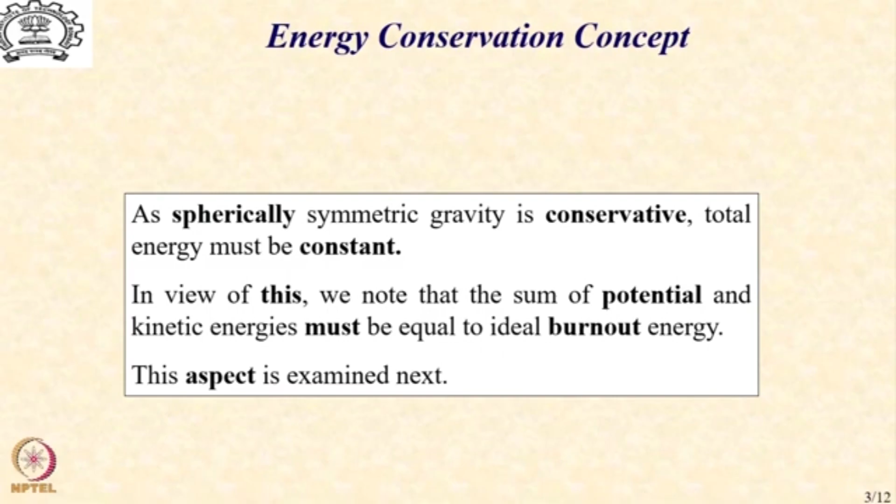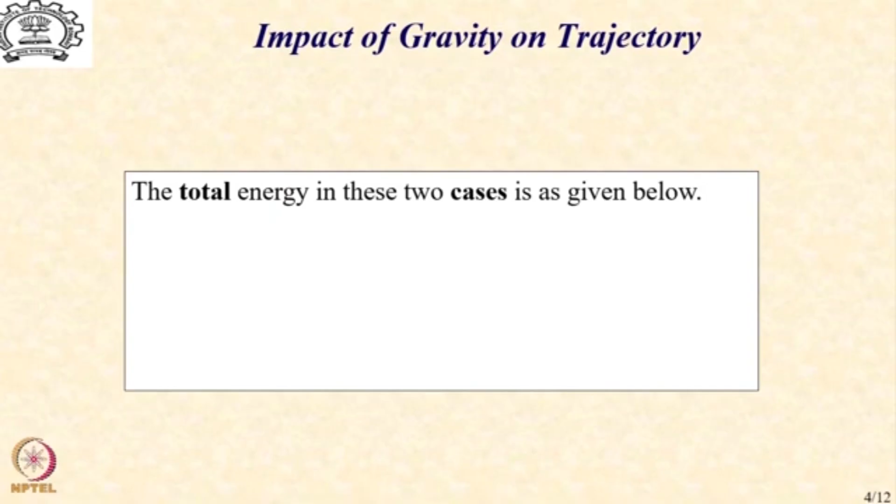So we take the same problem that we have solved in the previous lecture, and let us calculate the total energy in the two cases, that is the ideal burnout and the burnout in the context of constant gravity model. So in the ideal burnout case, the kinetic energy is the only energy, because there is no gravity, so no work done against gravity. And that is nothing but half V square, and that is per unit burnout mass. So we have normalized it because the burnout mass is same in both the cases. And that number is 5.327 × 10^6 with appropriate units.

In case of burnout under gravity, the total energy is going to be half V square, that is kinetic energy, plus g into h, which is going to be the potential energy part. So we perform that sum. I suggest that you do this exercise yourself and confirm that under gravity the energy is going to be this value, which is 3.393 × 10^6, and that is something which is not expected. The total energy under gravity is significantly less in comparison to the total energy under ideal burnout.

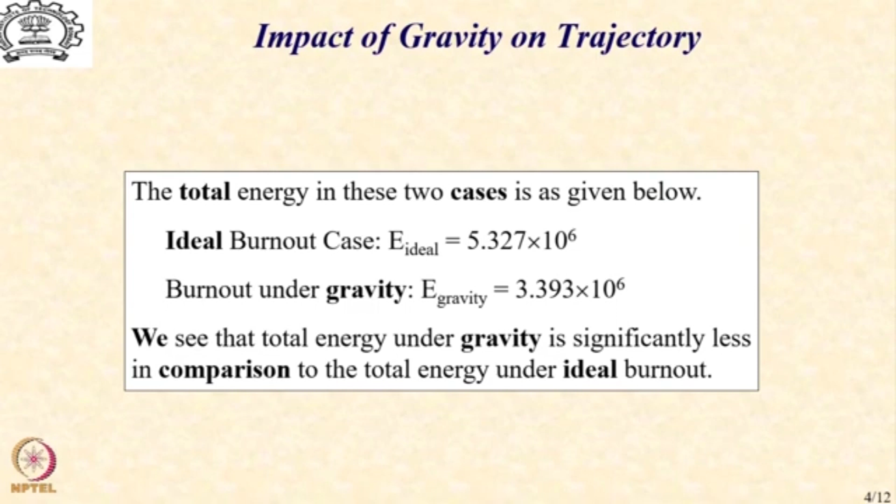So our hypothesis that as the gravity is a conservative force field, the total energy should have remained constant is not justified. It is violated. So let us try and understand what has happened. So we know that total energy which should have been conserved is not conserved. So we bring in a point which probably we did not specifically note while talking about energy conservation. You would realize, and probably you can independently confirm, that the energy conservation holds good only if the mass is also conserved. This is something that is part of the various conservation laws that are established, and you can verify this independently.

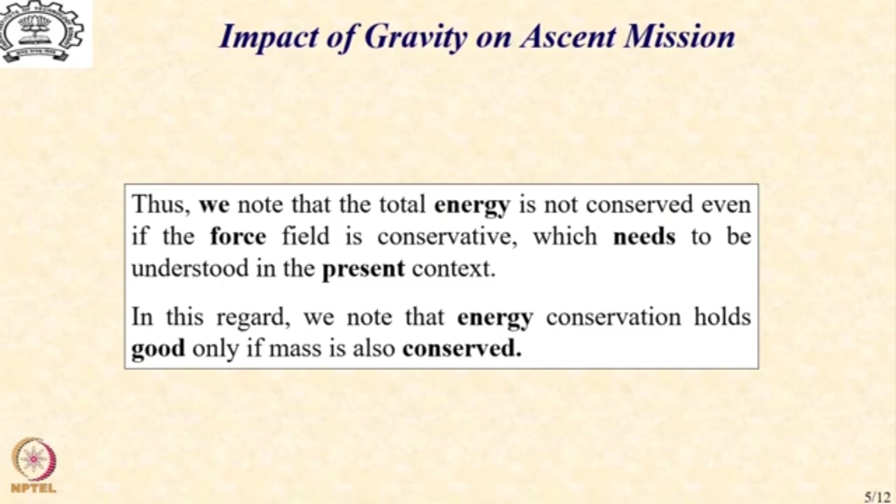But let us now bring in this idea about mass conservation to see whether there is an issue which is causing this deficiency of energy. So in the present case, we find that though in an overall sense mass is conserved, which means if we choose a control volume approach which contains the rocket and the burnt gases as a single control volume, the mass is conserved and so the energy is also conserved.

But we realize that this burnt mass in form of a gas is absolutely useless to the ascent mission, as this energy is not recoverable as far as the burnout mass MB is concerned, which is the payload as far as we are concerned. So obviously this energy is simply a loss to us. It is released in the atmosphere at different altitudes as the ascent mission proceeds, as clouds of gases, particles which have been given velocity and altitude, but then it's all a waste.

There is another aspect which we need to note, that while we are burning a small portion of propellant which generates this cloud of gas which contains particle and energy, the energy that it imparts to the rocket also goes to the unburnt propellant which is still there and which is going to get burnt in the next instant. So not only we are wasting the energy which is part of the gas cloud, we are also imparting wasteful energy to the unburnt propellant, which in the next or subsequent time instants we are going to burn and throw away. So that energy also is going to be a loss.

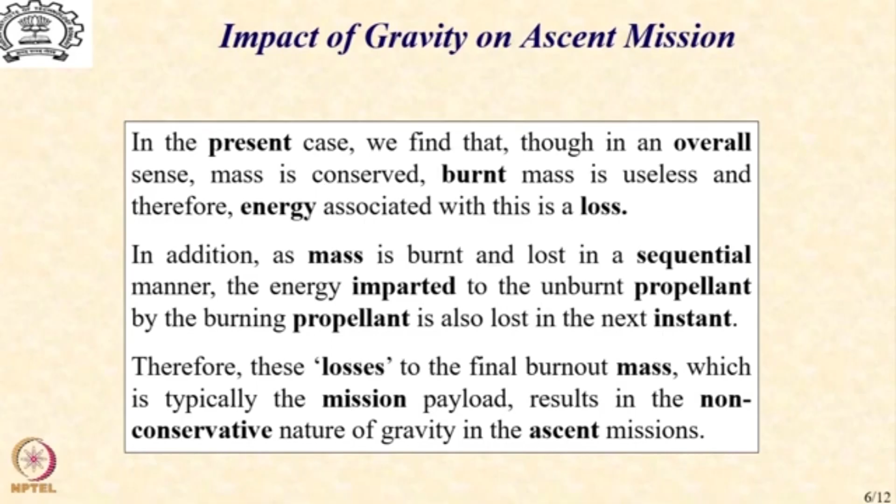If you put all this together, you will find that this is going to represent a reasonable amount of loss and will be responsible for the non-conservative nature of gravity in the ascent mission. So please note, we are not violating any of the fundamental conservation laws. But by defining our energy conservation in a very, very specific manner, that is, the energy which is imparted to the burnout mass, the final unburnt mass which is left after all the propellant has been consumed, the mission is non-conservative in nature, even under the action of a conservative force field such as gravity.

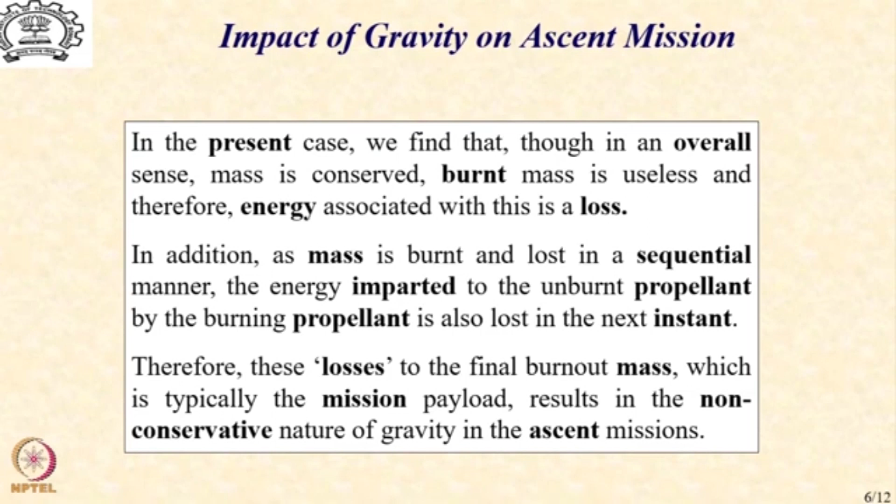In fact, in the present case, you will note that this loss is almost of the order of 36%. And naturally it is not tolerable. So there must be an effort to reduce this loss to a significantly lower amount. We may not be able to completely eliminate it, we don't know yet, but at least it cannot be allowed that 36% of energy is simply lost. That is going to have a huge impact on the cost of the mission itself.

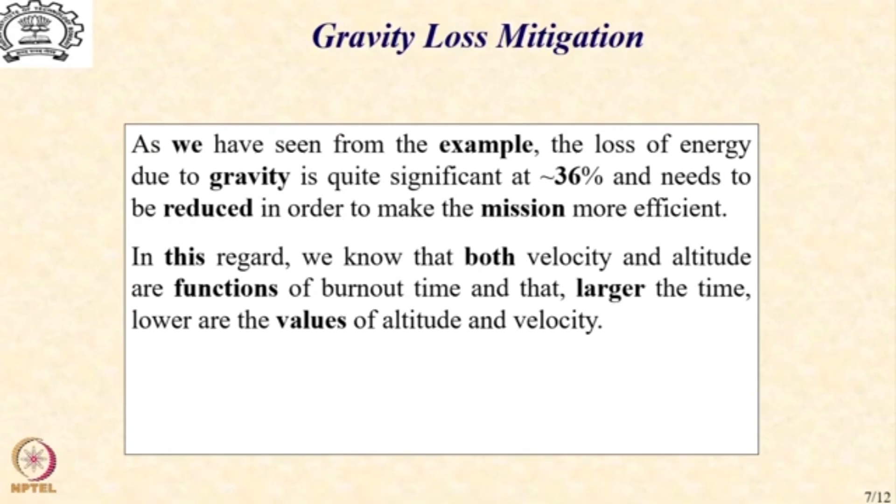So in this regard, we know that both velocity and altitude are functions of burnout time, and that the larger the time, the lower are the values of both altitude and velocity. This you can independently confirm from the expressions that we have seen in the last lecture. So obviously it means that an important parameter which is responsible for this loss is the burnout time, the time taken to complete this whole process. So if we can directly impact the time, maybe we can influence the overall loss and make the mission more efficient.

And this can be done in one way by increasing the burn rate. So if you increase the burn rate for a given propellant, then the time that it takes to finish the propellant is smaller, and because the time is smaller, the loss due to gravity is likely to be smaller. Let us see if this is justifiable, and this actually turns out as what we have interpreted.

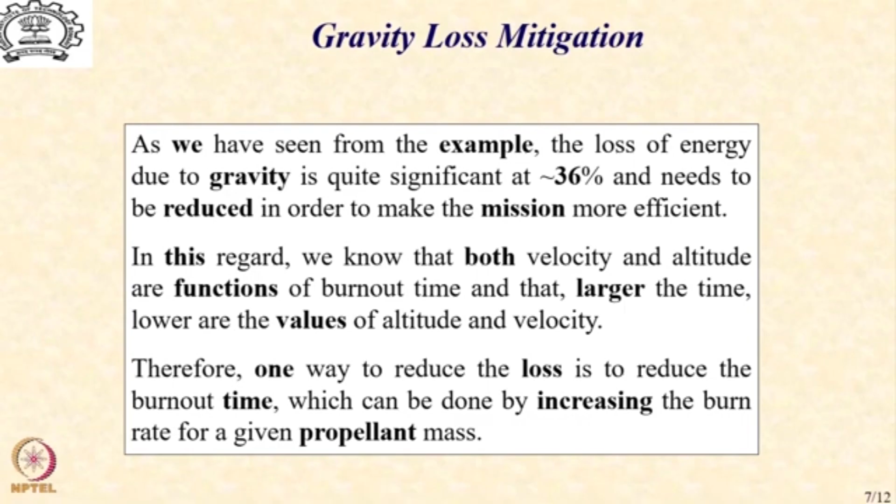So let us now consider the same example that we have seen earlier and now generate the terminal condition for two different burn rates, one of 600 kg per second that we have already seen, and another one double, that is 1200 kg per second. And let us look at the solution. I'm not going to go through the steps of arriving at the solution. I suggest that you do that, but I'm giving you the final result.

So we already know our ideal velocity is 3.264 kilometers per second. For 600 kg per second burn rate, our burnout velocity is 2.28 kilometers per second with an altitude of 77.6 kilometers. And for 1200 kg per second, the velocity is 2.77 kilometers per second with an altitude of 51 kilometers. So you realize that with higher burn rate, the velocity has gone significantly higher. The altitude also has reduced, but possibly not by the same percentage.

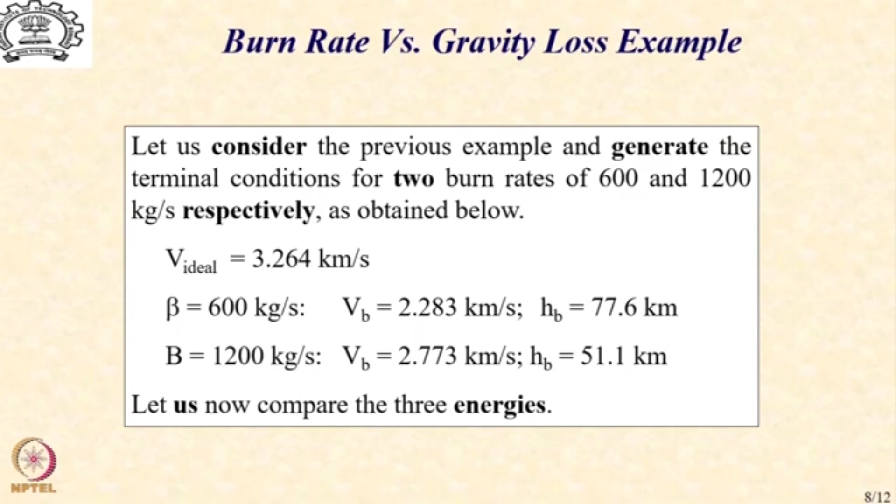And more importantly, the kinetic energy is a function of the square of the velocity. So the increase in the kinetic energy is likely to be significantly higher than the decrease in the potential energy because of the loss of altitude. So there is an expectation that the total energy is likely to be higher. Let us now compare the three energies and see whether our expectation is met.

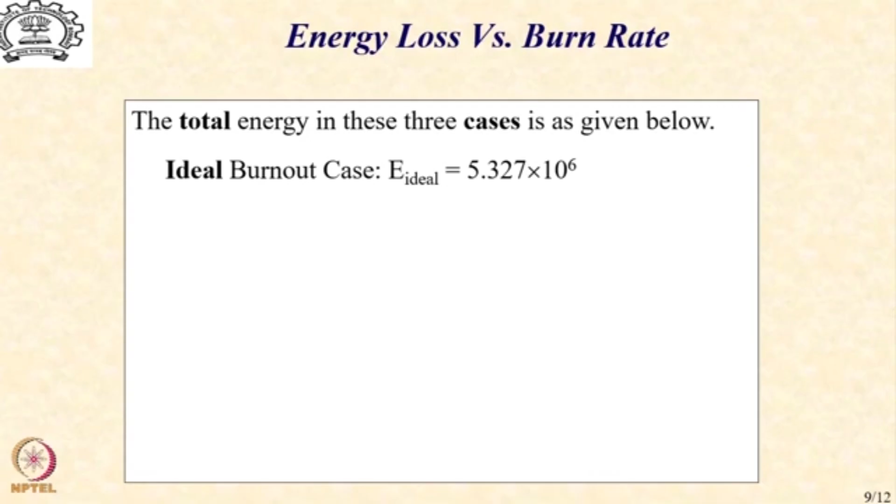So the total energy in the three cases: the ideal burnout is 5.327 × 10^6. The burnout for beta equal to 600 is 3.393 × 10^6, and burnout for beta equal to 1200 is 4.346 × 10^6.

And immediately you realize that the energy is significantly higher for the beta equal to 1200 case as compared to the beta equal to 600 case, which means that now our loss is much lower. In fact, we can calculate this loss to be about 18%, which is half of the previous loss. And immediately we realize that by increasing the burn rate, we can improve the efficiency of the ascent mission from a gravitational loss point of view.

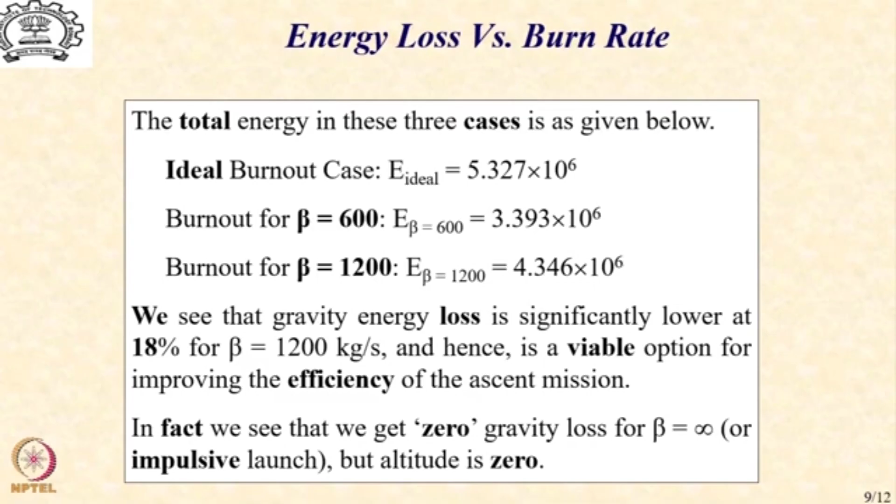In fact, we see that we are going to get zero gravity loss for beta equal to infinity, which is nothing but an impulsive launch, which means if we burn all the propellant in almost zero or a very small time, we are going to get the full mechanical energy. The only thing will be that the altitude is zero. And this is something that you need to understand in the correct context.

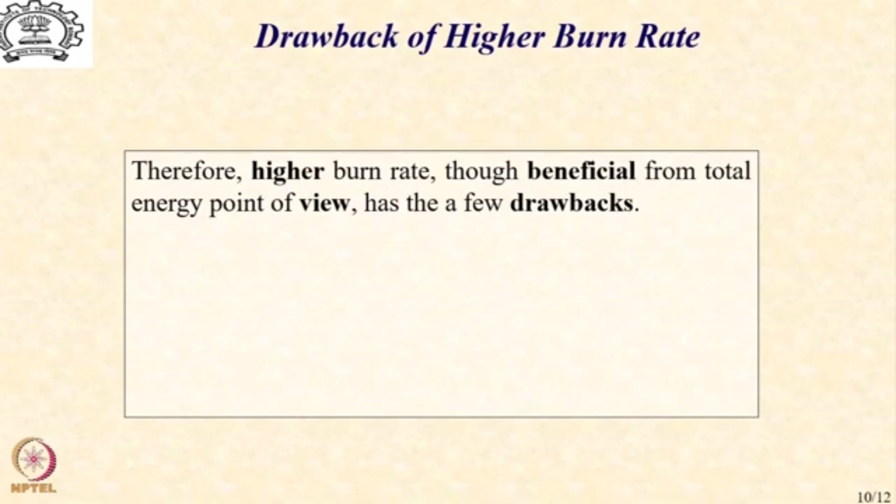So, what is the drawback of this higher burn rate? One of the basic drawbacks is that you are going to get a lower altitude, while it may be a requirement that you want a higher altitude. But if you burn at a faster rate to reduce the gravity loss, you are going to generate a lower altitude. So obviously this is a drawback that you need to take into account.

Secondly, a larger velocity occurs in the lower atmosphere, which is also denser, and which can have both control and aerodynamic related implications. As we have already seen in our aerodynamic model, a higher velocity in the denser atmosphere is going to generate higher dynamic pressure and the possibility of higher drag. So obviously, while we may reduce the loss due to gravity, we may introduce additional loss due to drag, and we may have to look at this issue in greater detail, which we will do later.

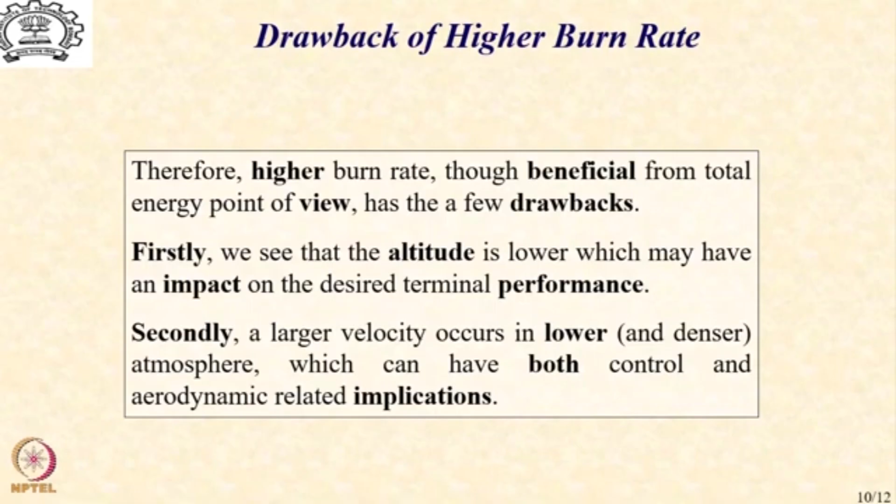Of course, from whatever we have done so far, it is possible for us to give a closed form expression for the gravity loss with respect to the burn rate, which is a good expression and a design tool for understanding what loss is going to be due to gravity because of a particular burn rate. I am showing you the steps here.

We have used the expressions that we have generated earlier, and based on that we have modeled the delta E, which is the loss in the total energy due to gravity, as a function of beta, and finally we find that this is a function of ISP and is inversely proportional to beta. So we clearly see here that as beta increases, the loss is going to reduce.

However, we also note an interesting point that if you use a higher ISP fuel, or if you use a larger liftoff mass, or you use a larger propellant fraction, the loss is going to increase. And you will realize that now it's going to be a trade-off in the design among these parameters for making an ascent mission as efficient as possible through any optimization procedure.

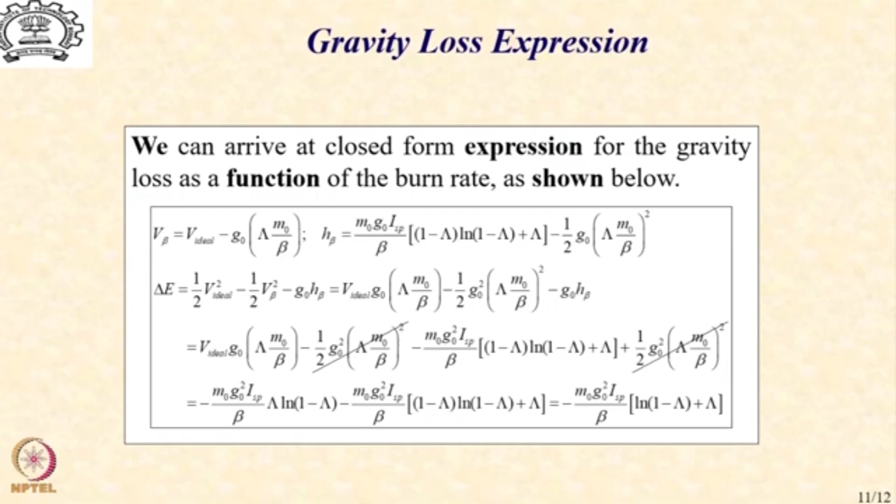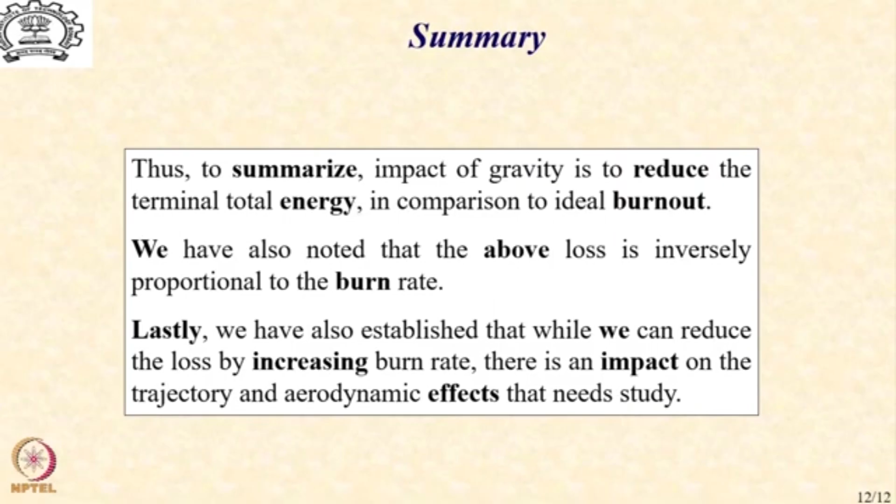So, to summarize, the impact of gravity is to reduce the total terminal energy in comparison to ideal burnout. We have also noted that the above loss is inversely proportional to the burn rate, and we also established that we can reduce the loss by increasing burn rate, but there is an impact on the trajectory and aerodynamic effects that needs further investigation.

So in this lecture we have seen the implication of gravity on the terminal performance, and we have noted that gravity represents a loss of total energy, which is not very intuitive, and that this loss can be minimized by increasing the burn rate, but it will have associated drawbacks that we need to discuss and understand.

Now, in the next lecture, we are going to introduce the drag as a parameter, and we are going to look at the performance of the rocket under both gravity and drag, and then we will also look at the possibility of arriving at a viable burn rate that is going to be beneficial from both drag and gravity point of view.